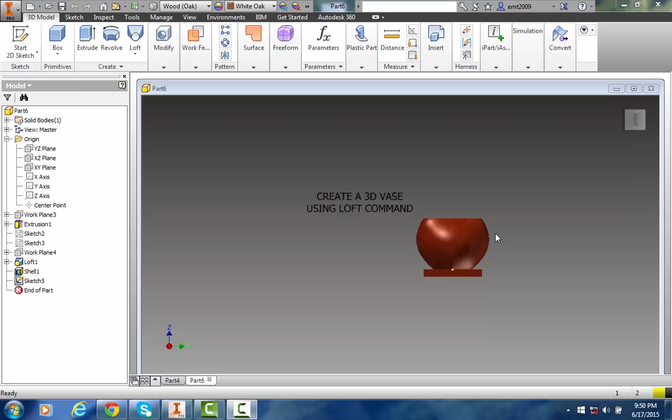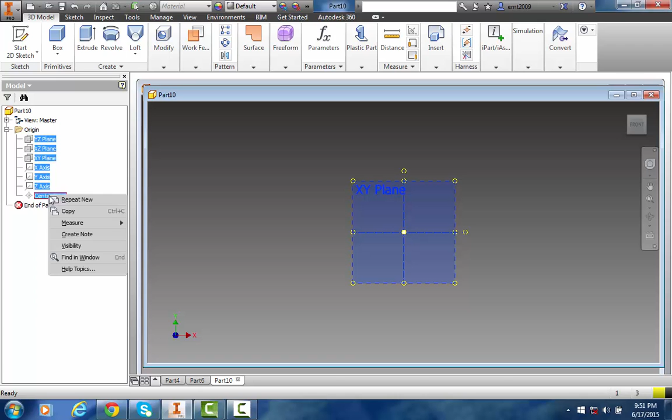But first we will start a new part file in metric. We will first turn on these planes and axes. So we highlight them and turn the visibility on, and we will start with a sketch of the base. So we'll start with a new sketch.

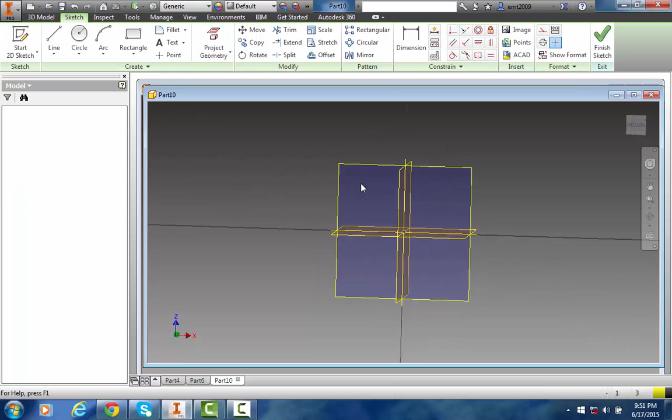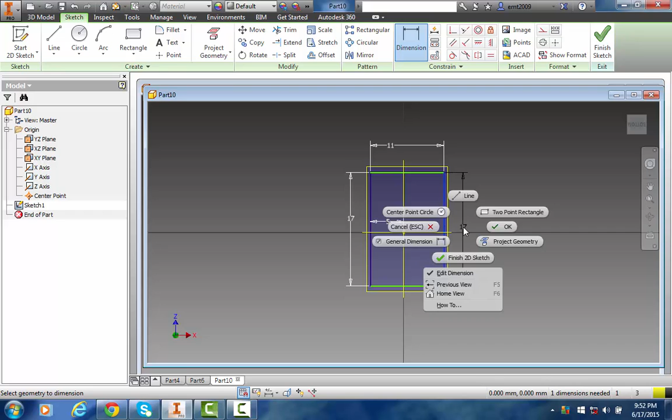We're going to use 2-point rectangle, and we will add the dimensions. Okay, now we'll change the dimensions. We're going to make this side be 80 millimeters. This will be 60.

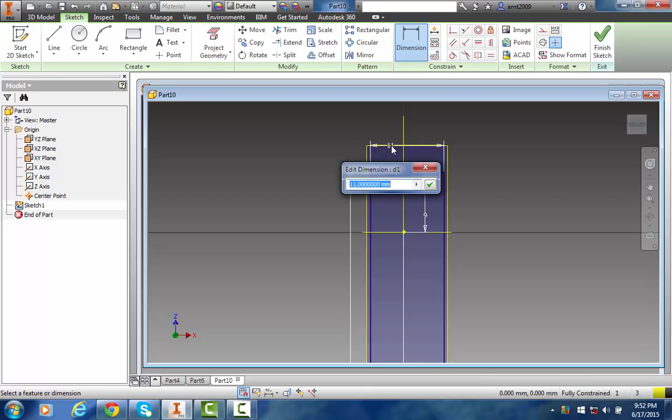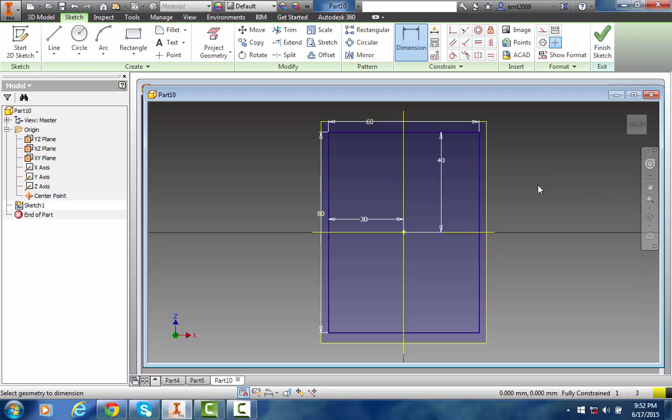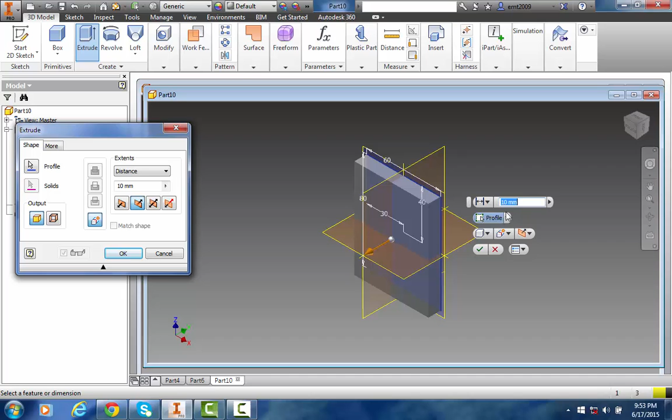Zoom all to refit it to the page. This will be half of that, so it's going to be 30. And this will be 40. So as you can see, that's your dimensions. We will now go ahead and finish sketch, and we're going to extrude, and we're going to let it go in the other direction. We will let it be 10. It's 10 millimeters, so we hit OK.

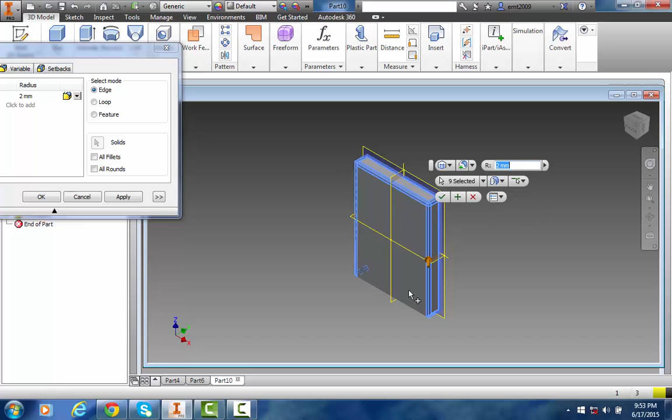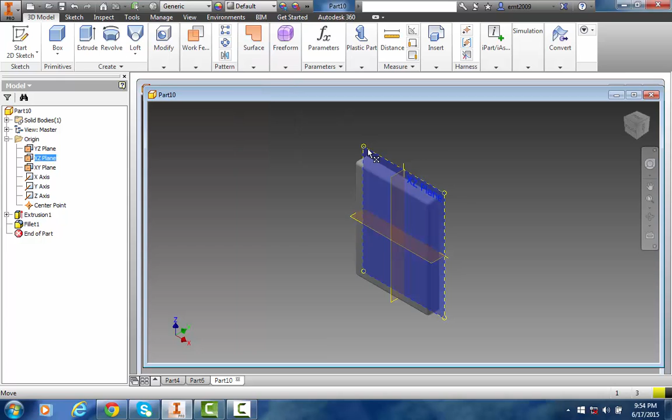Now we will just go ahead and modify the edges to give us a nice smooth edge. We will use the small radius of 2, so we'll click on the edges, so now we can say OK. Have a nice surface, and we will start with a new sketch on the plane. That's to start the loft.

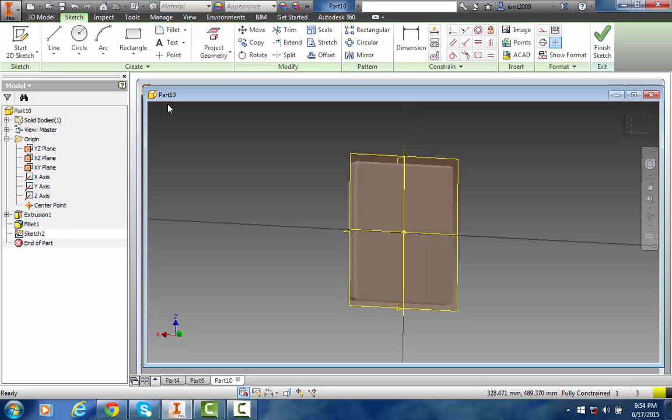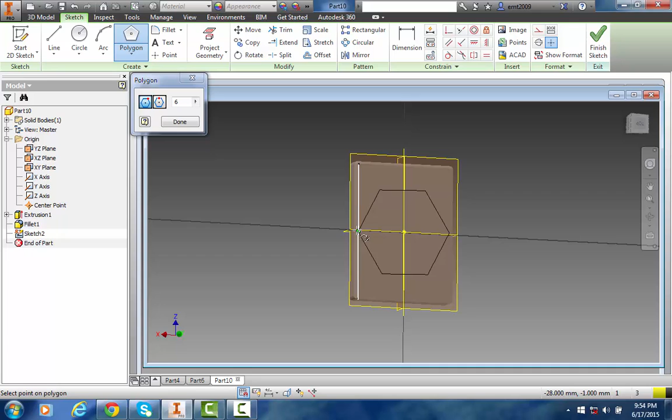Want to create it here, so I'm gonna start with a polygon, and I'm gonna find my polygon, and we'll just use these dimensions that's already there. So we'll make that be the size of your polygon, 6 sides, and that's it.

Then we'll create another sketch, a work plane. So we'll finish sketch here, and we go to plane and offset a plane, and we're gonna make that plane be 40 millimeters away, and we can now go ahead and create a new sketch on this plane.

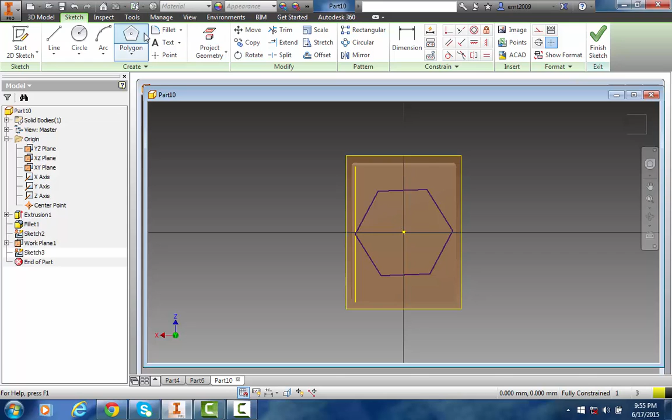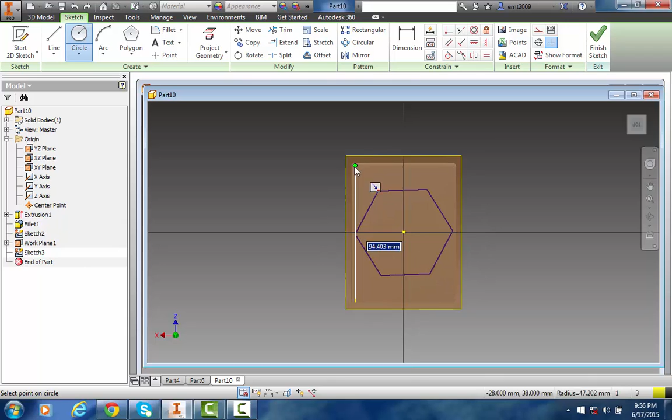And I'm gonna use a circle on this plane, and I'll make the circle be the length of the triangle, or rather I'll make the circle be as big as the diagonal of my base. Okay, so I can finish sketch.

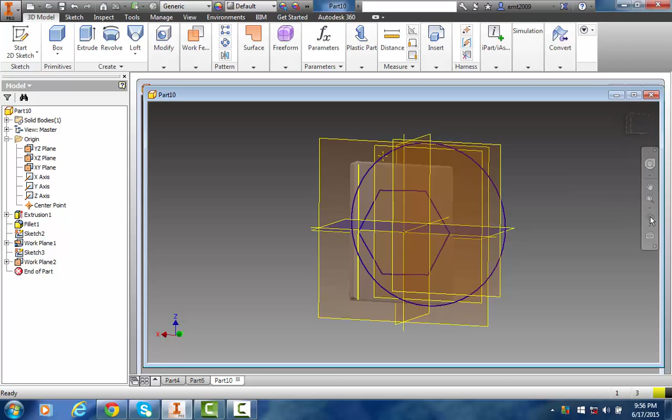Then I'm gonna start a new sketch. This one I'm gonna offset it from this plane here. So I'll go to plane and get the offset, and from this one I'm gonna make it be 30. It's 30 millimeters. So that's the direction in which it's going. So I'm gonna start a new sketch in this one, and I'll let this one be my last sketch.

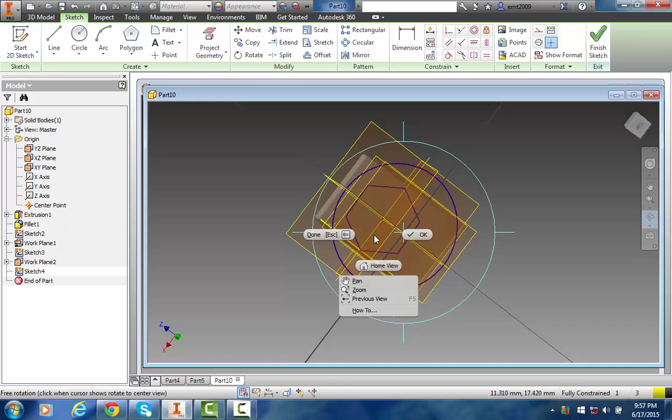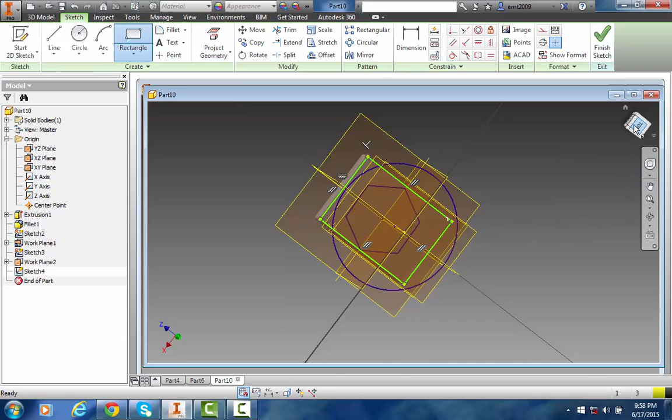Now I'll just go ahead and use a rectangle, and this time it's a 2-point rectangle. I want this rectangle to be the same size of the base. So I'm just gonna look for it, and make it be the same size as the base. And I'll just add the dimension to it just to make sure it's about it. 80.

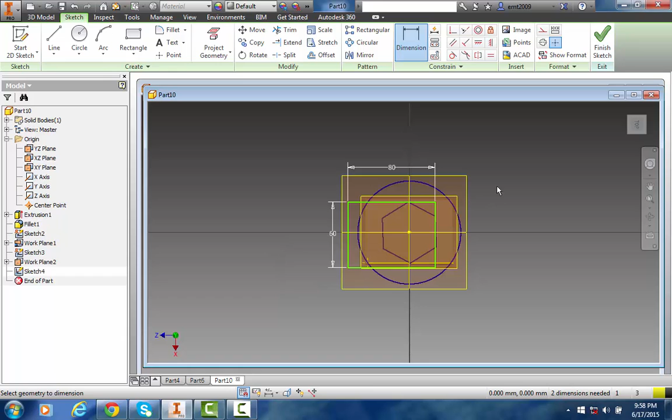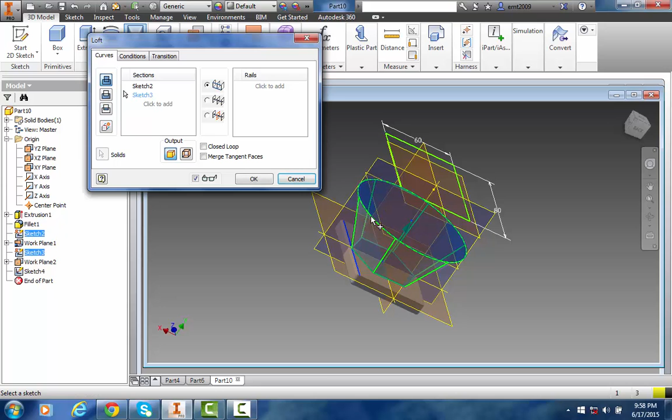Now I can right click, finish sketch, and there I have my sketches to create my loft. What I'll do now is go to loft, and I will start with my base. Then I go to my next one, then I go to my top, and I'm gonna say OK. So that's my vase, but I need to have the opening here.

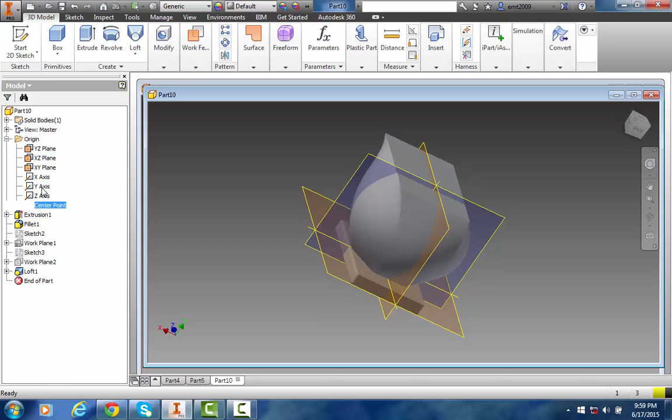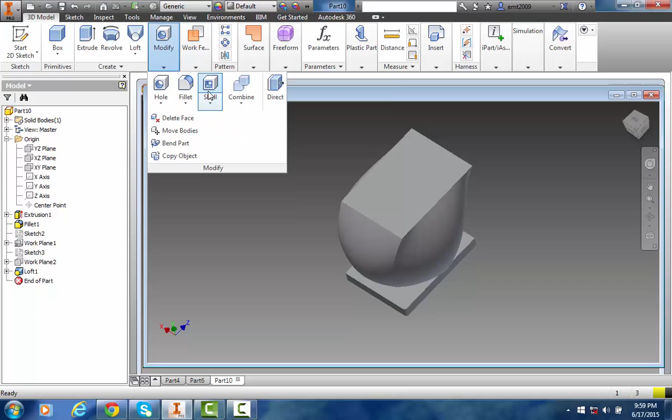What I'll do, I'll just remove the planes, and then I'll remove the inside. So I turn visibility off, and that's the shape of my vase. What I'll do next is use shell to remove the inside. So I'm gonna go to shell, brings up the dialog box, and this one is good to remove the inside.

So I click on the surface, and I want the thickness of it to be 2 millimeters. Okay, 2 millimeters for the thickness, or I'll make it 2.5. Not much difference. Okay, so now I'll go OK.

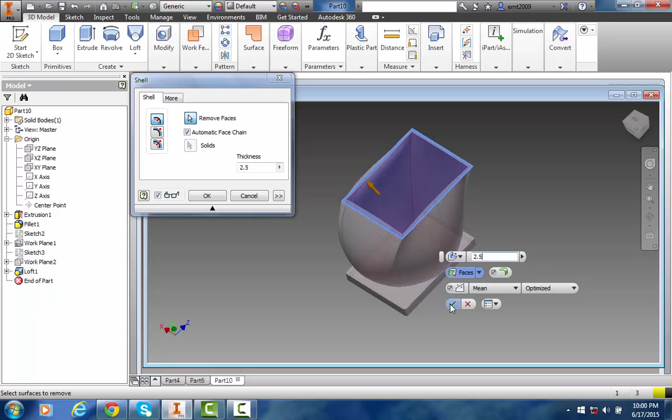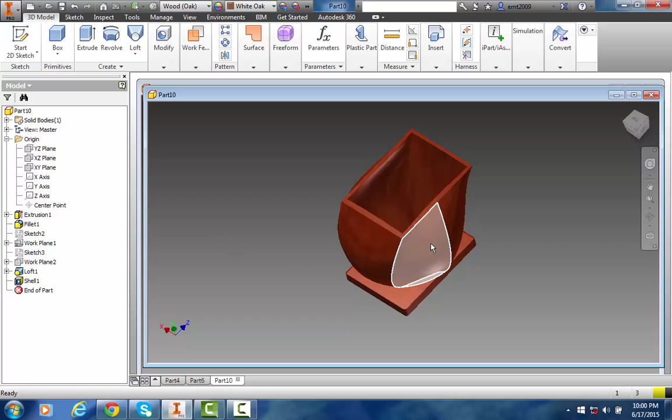That's my vase, and I want to put the material on it. Use a nice oak, and that's it. Put your pencils, your pens, put it on your desk.